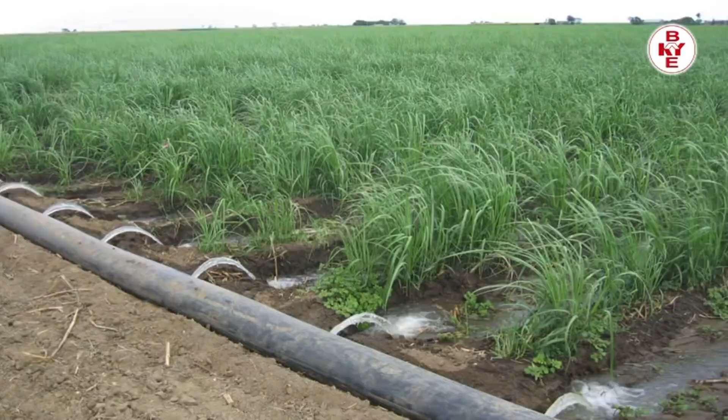Isgec Heavy Engineering Limited provides services to the customer for the development of sugarcane crop, including preparation of land, development of seed, cultivation of crop, application of biofertilizers and organic fertilizers, development of irrigation facilities, harvesting methods, and transportation system of the cane crop to the processing facility.

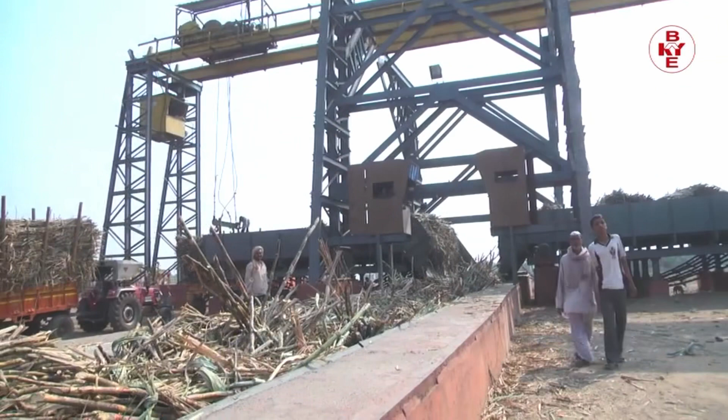Company also executes sugar manufacturing plants from cane sugar along with cogeneration, alcohol and ethanol on EPC basis including civil work. We provide training to the staff of customer and also operate the plant on their behalf as per requirement.

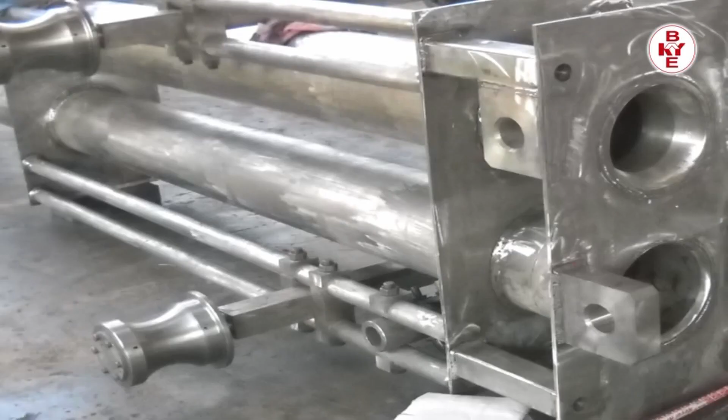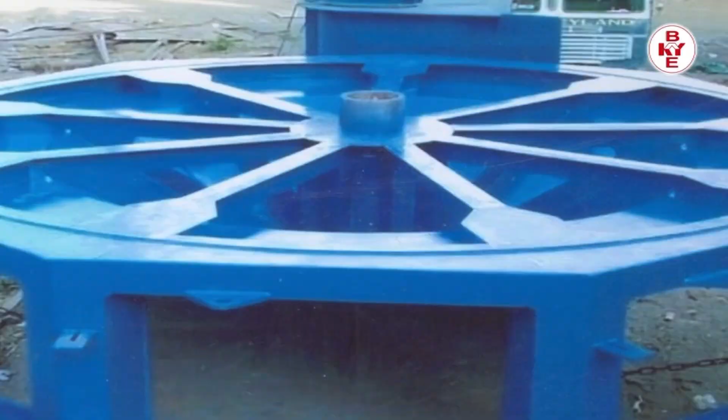Company also works for Department of Atomic Energy, Nuclear Power Corporation of India Limited, various defense laboratories and Indian Space Research Organisation. Company also works for oil and gas sector, supplies equipment to original equipment manufacturers of cement,

steel and paper industry. Isgec Heavy Engineering Limited, Unit 1 and 3 are located in Satara, Maharashtra, and Unit 2 is in Yamunanagar, Haryana. Our regional offices are in Pune, Chennai, Delhi and Yamunanagar.

Late Lala Kailash Chandra, a great visionary and philanthropist, is the founder of K Group of companies. Isgec Heavy Engineering Limited was incorporated on 4th October 1993.

The company is supported by a consortium of banks: Exim Bank of India, IDBI Bank, Bank of Maharashtra, Oriental Bank of Commerce and Dena Bank.

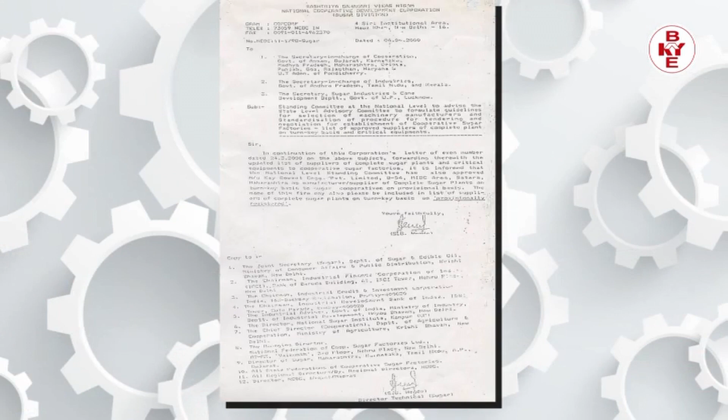Company is having registrations with National Cooperative Development Corporation for Turnkey Sugar Projects, Commissioner of Sugar Maharashtra for Alcohol and Ethanol Projects, Nuclear Power Corporation of India Limited, Department of Atomic Energy, Bharatiya Nabhikiya Vidyut Nigam Limited, Bhabha Atomic Research Center,

Defense Research and Development Organisation, Armament Research and Development Laboratory, Oil and Natural Gas Corporation, ISO 9001:2008 and AS 9100C for Quality Management, Directorate of Steam Boilers, R&U stamp by American Society of Mechanical Engineers, and the quality policy of the company.

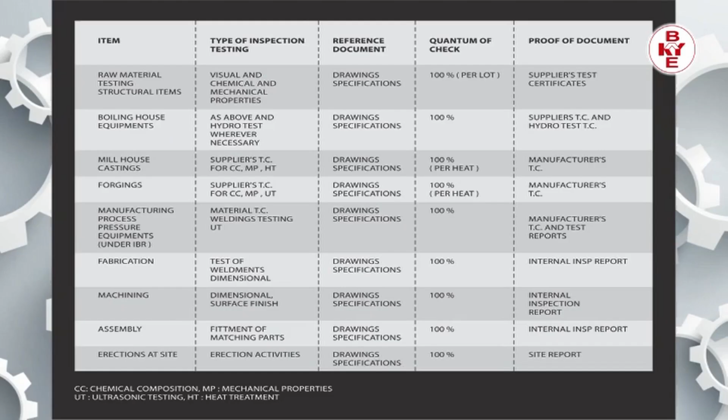Our quality assurance plans are in place. Isgec Heavy Engineering Limited is having following divisions: Sugar manufacturing plants, divided into following divisions: agriculture, sugar machinery, cogeneration, distillery, biocompost, operation, special products, and general heavy engineering.

Agricultural Division: In Agriculture Division, Isgec Heavy Engineering Limited gives support to farmers and industry for increasing the yield and recovery of the crop with advanced techniques, starting from seed generation to harvesting and transportation of cane to the processing facility. Generation of seed by tissue culture method.

In the tissue culture lab, we generate a variety of plantlets of any plant, absolutely disease-free, in a biohygienic and scientific way, especially for sugarcane. In any tissue culture lab, the apical meristem technique is used.

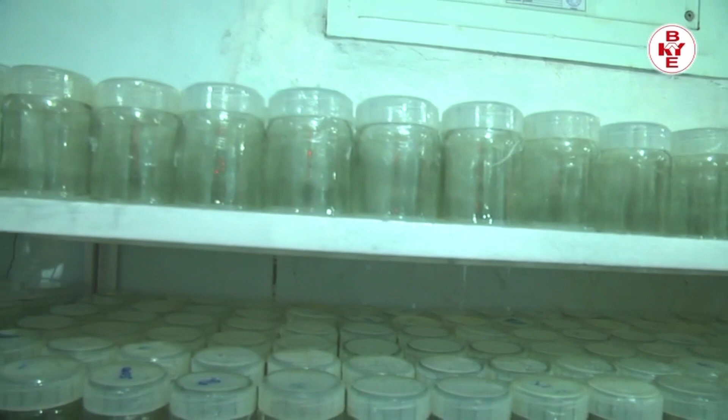We wash the glasswares with ordinary water and rinse with chemical. After sterilizing the glassware, different types of media are prepared as per variety of crop in the media preparation room at a constant temperature of 16 degrees Celsius.

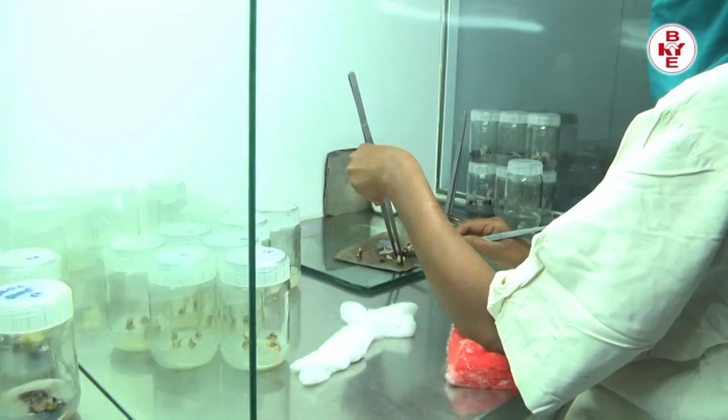After storing it for 2 days in 50 ml bottles, it is shifted to the inoculation room and kept for 20 to 25 days. When first generation takes place, these bottles are transferred to the incubation room having a temperature of 24 degrees Celsius. First generation of plantlets are multiplied in the incubation room in 4 stages over 150 days.

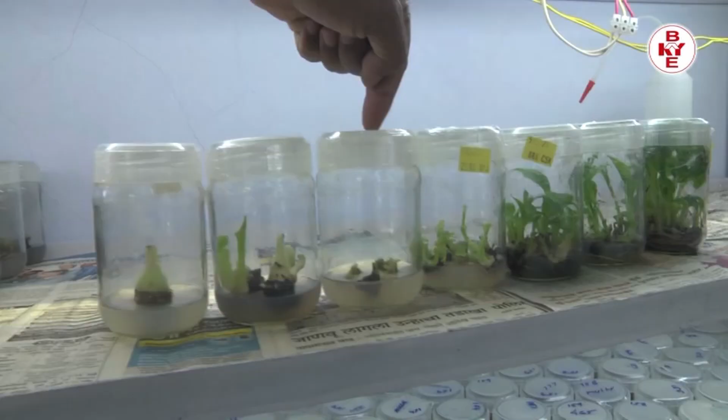These plantlets are converted into the shooting stage and finally the rooting stage. Rooting stage plantlets are transferred into the greenhouse in a tray and finally into polybags. Plantlets in polybags are planted in a scientific way, maintaining a gap of 1 foot between plant rows. The whole procedure of development takes about 7 to 8 months.

Preparation of land and cultivation of crop: we have to prepare the land for sowing disease-free plantlets produced in the tissue culture lab by maintaining the pH of the soil using lime powder, green manure and biocompost. Biocompost is generally made from filter cake, a byproduct of the sugar plant.

After plantation, bud germination takes place in 7 to 8 days to the extent of 98%. Organic manures in the form of biofertilizers are applied after bud germination, using biofertilizers with irrigation techniques. There are a number of biofertilizers named Acetobacter, Innophos, Innopotash, Innodecomposer and compost culture, which are applied for achieving maximum yield.

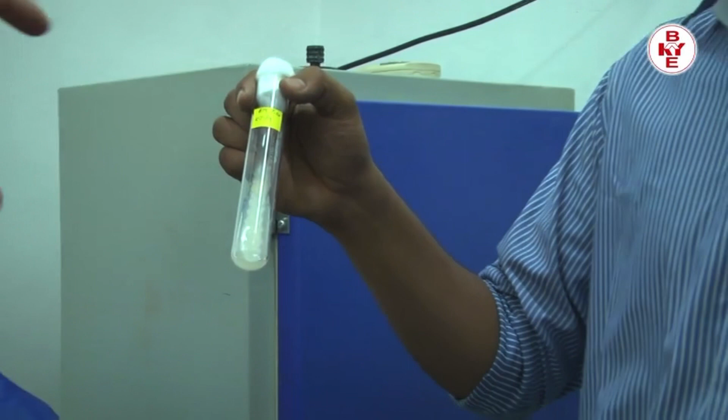Biofertilizers are made by solubilizing bacteria mixed with media. After inoculation, these are kept in shaking for 72 to 90 hours and finally diluted in a 1:5 ratio. The shelf life of these biofertilizers is 1 year and doses are about 10 kg per hectare. These are used once in 2 months and cannot be used after applying chemical fertilizers or insecticide.

While using biofertilizers, we should also concentrate on irrigation techniques. After 4 to 5 months of sowing, we have to manage pest, disease and weed control till 10 to 12 months, followed by harvesting, loading and transportation.

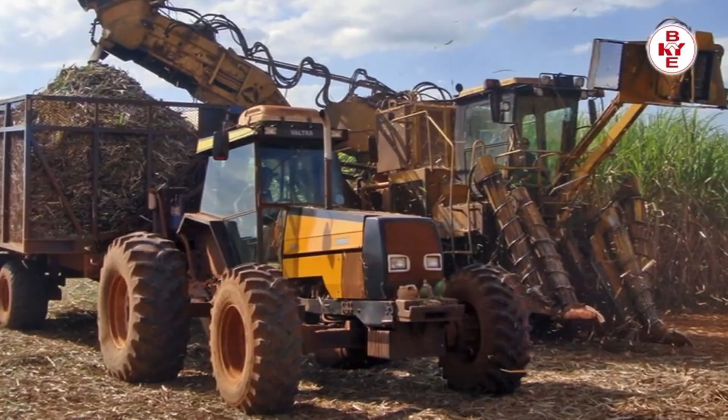At the age of 12 to 14 months, the crop is ready for harvesting and can be harvested manually or by mechanical means. During harvesting, trash should be taken out. Sugarcane stems should be loaded onto the vehicle manually or mechanically for transporting the crop to the processing facility. By using these scientific methods, we can achieve a yield of 80 to 100 metric tons of cane per hectare with 12 to 16 pol.

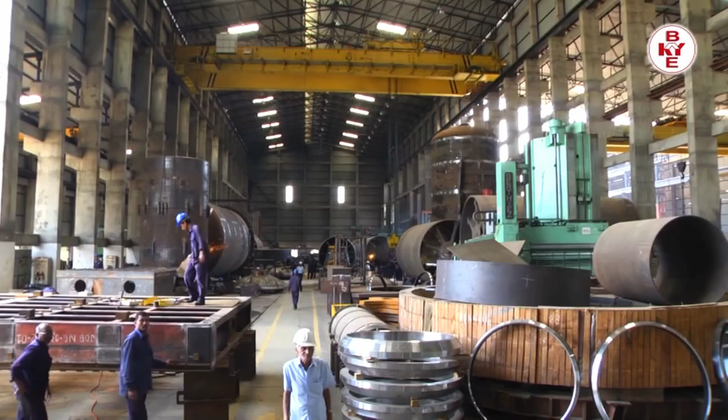Sugar Machinery Division: In this division, Isgec Heavy Engineering Limited undertakes designing, manufacturing, supply, construction and erection of complete sugar plants on an EPC basis. Here is a brief overview of our facilities.

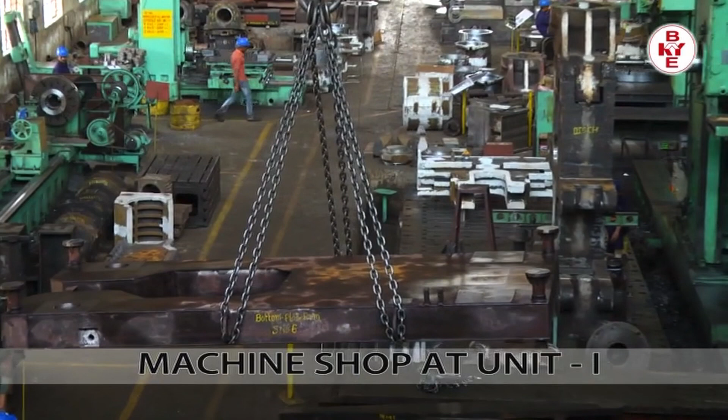Marketing and Engineering Office at Pune, Marketing and Engineering Office at Yamunanagar. View of Unit 1. Machine Shop at Unit 1. Stainless Steel Fabrication Bay at Unit 1. Machining facilities of Unit 1 at a glance.

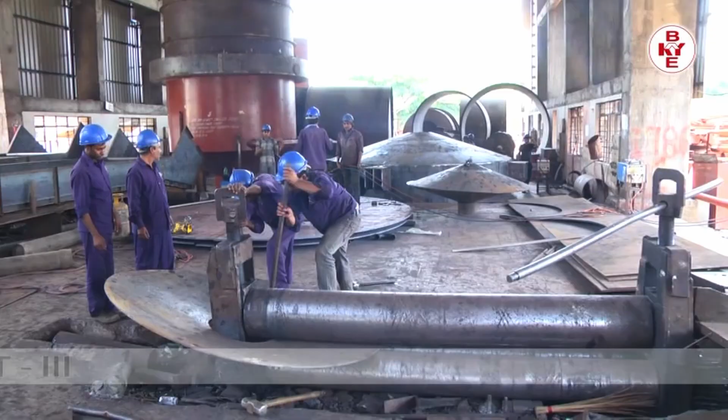View of Unit 3. Fabrication Bay at Unit 3. Machining facilities of Unit 3 at a glance.

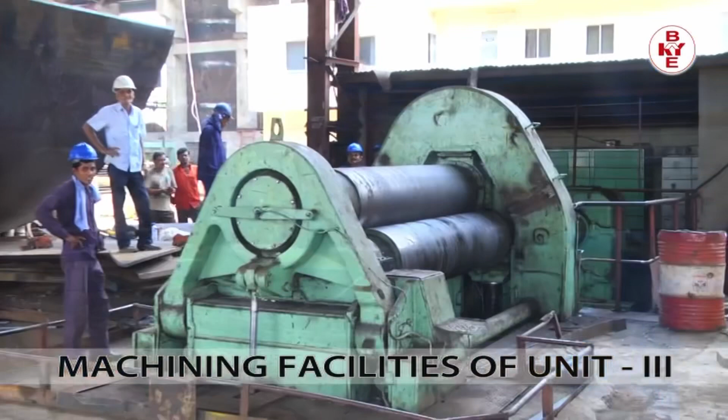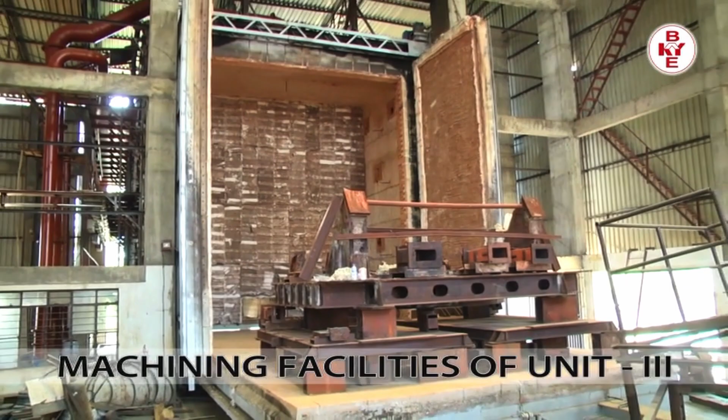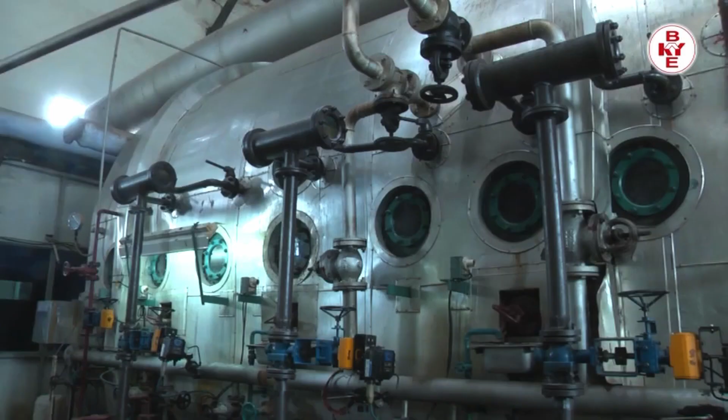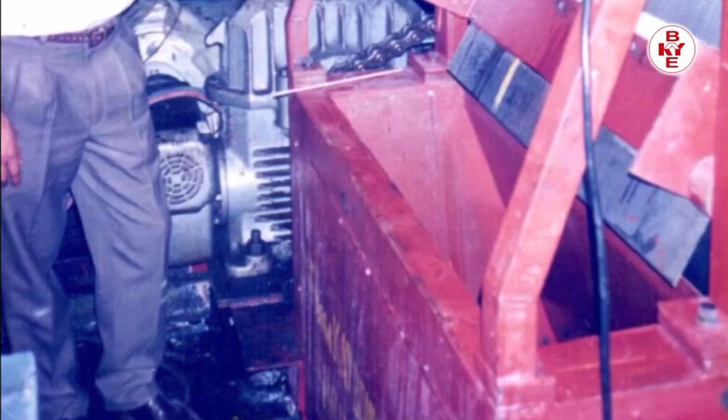View of Unit 2 at Yamunanagar. The company has innovated and successfully developed items for the sugar industry, including continuous pans for A, B and C massecuite, falling film evaporators, static type fluidized bed dryers for drying sugar, and massecuite filter typhoon for separating sugar particles from massecuite by vacuum.

Processing of sugar from sugarcane in one of the plants supplied by the company on an EPC basis. Milling section: after harvesting, the cane is brought to the processing facility and is weighed before unloading it with the help of cane unloaders or by truck tippler.

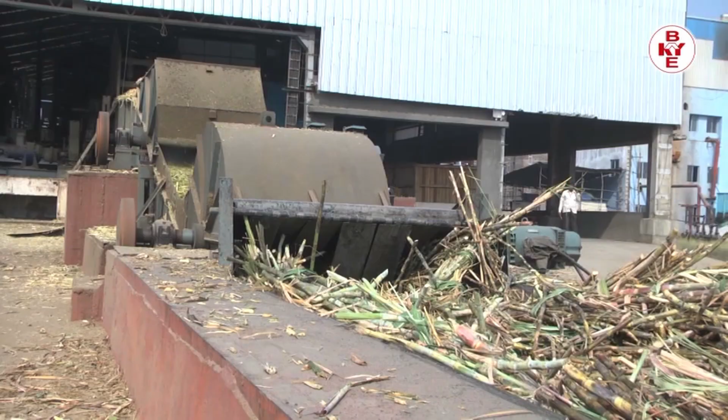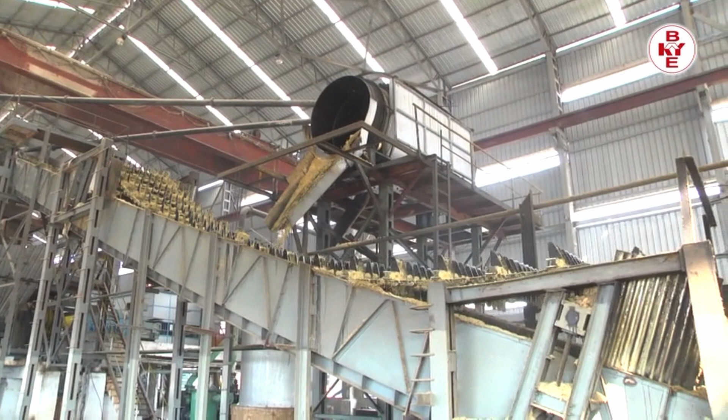Cane unloader places the cane on a feeder table to feed it onto the main carrier in a uniform and controlled manner. With the help of cane preparatory devices, namely cutter, leveler, fibrizer or shredder, the cane is cut into small pieces while being conveyed towards the mills; this is called prepared cane. The quality of prepared cane is measured in terms of preparatory index, which is usually maintained at 85+.

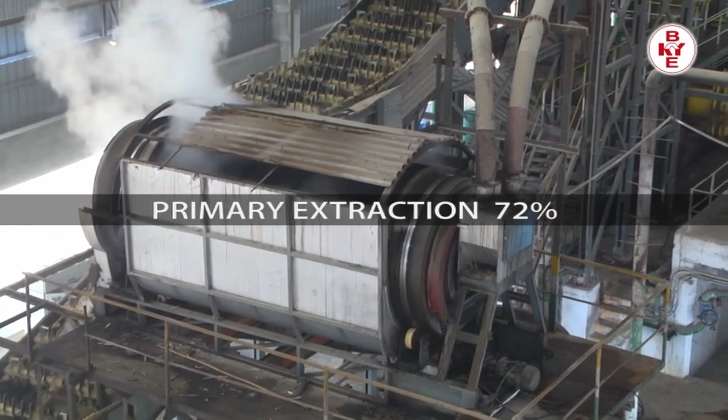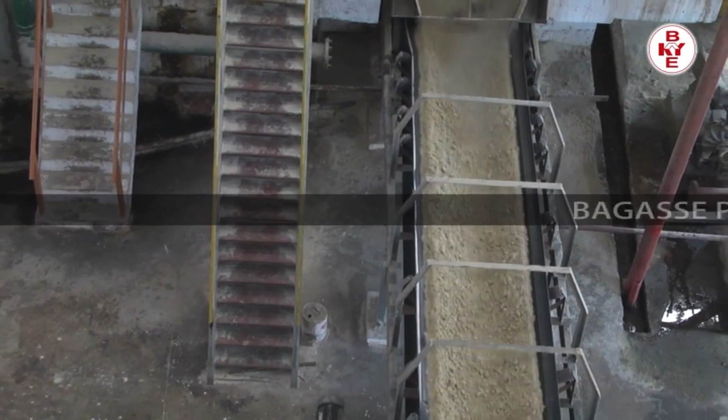This prepared cane is passed through a milling tandem to extract the juice. An efficient milling tandem should maintain performance parameters while crushing cane having 14% fiber.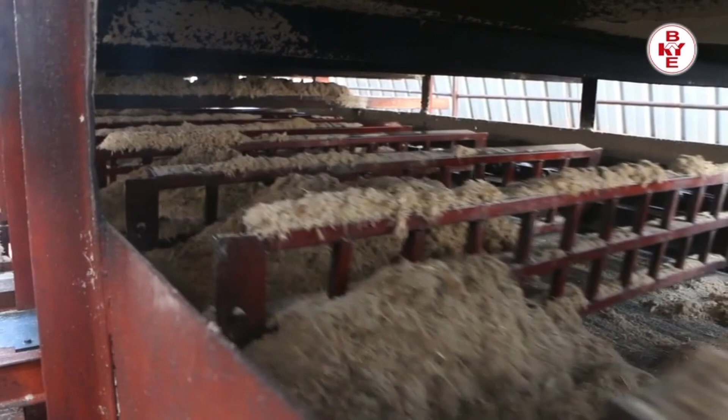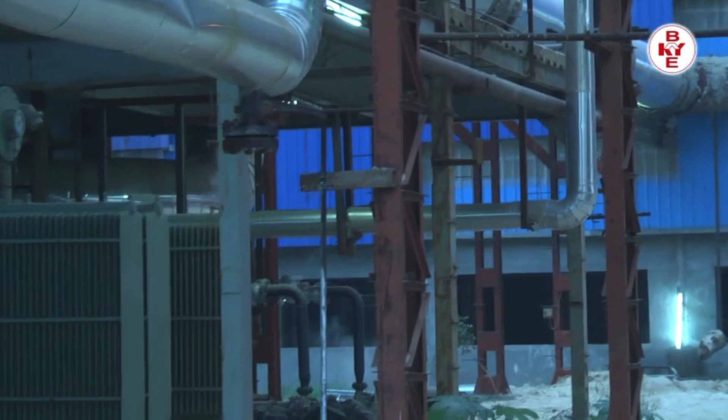Primary extraction 72%, reduced mill extraction 95 to 96%, bagasse pol 1.8 to 2%, bagasse moisture 48 to 49%. Boiler and powerhouse section: after the juice is extracted, the residual cane is called bagasse and is used as fuel in boilers to generate steam. Nowadays, high pressure boilers are used so that electricity can be generated by feeding this high pressure steam to the turbine. Whatever exhaust comes out from the turbine is used in the process house to produce sugar.

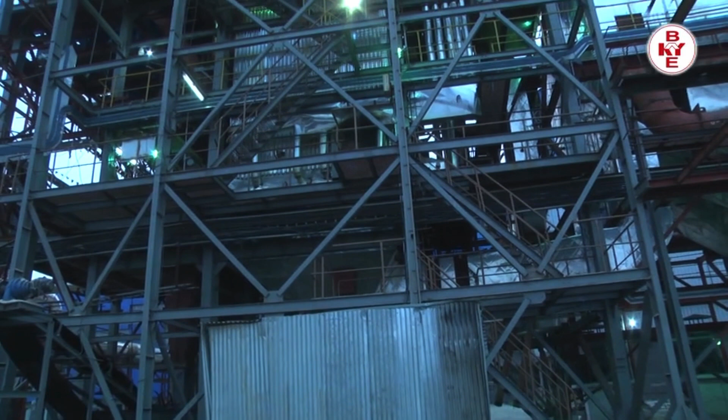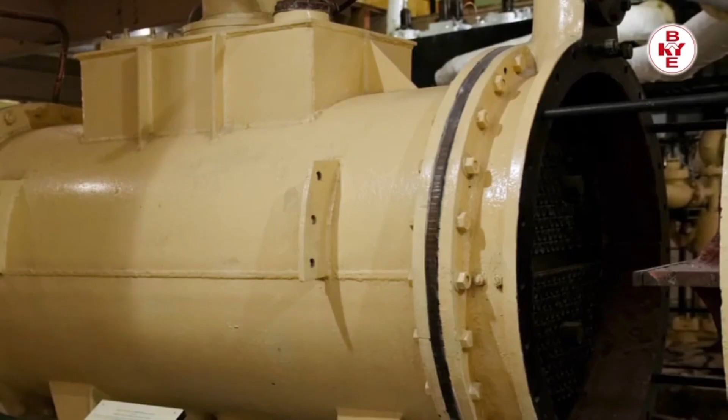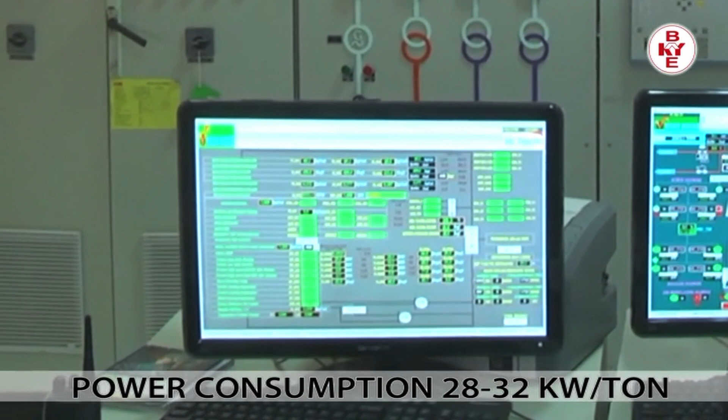Usually high pressure boilers having pressure up to 110 kg per centimeter square are used, and extraction-cum-condensing turbines are used to produce power. An ideal sugar factory should have a power consumption of 28 to 32 kilowatts per ton of cane. These types of plants are called cogeneration plants and are controlled by a DCS system.

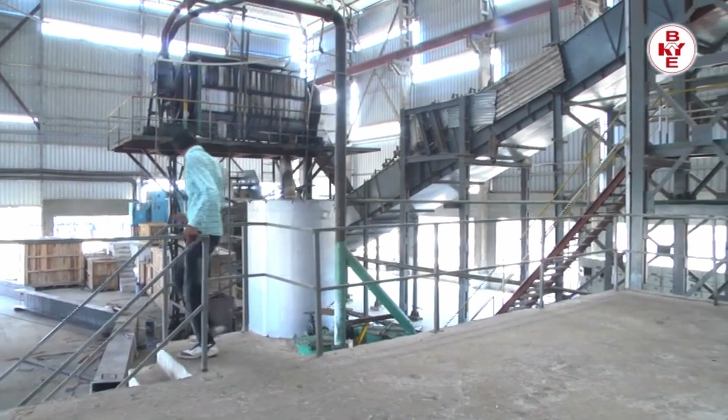Boiling house section: the juice extracted from the mill house is pumped through a flow meter to juice heaters for heating. This heated juice is sent to the juice sulfiter for purification with the use of milk of lime and sulfur dioxide. Sugar factories produce their own milk of lime using quick lime at the lime station, and sulfur dioxide by burning sulfur in the sulfur burner station.

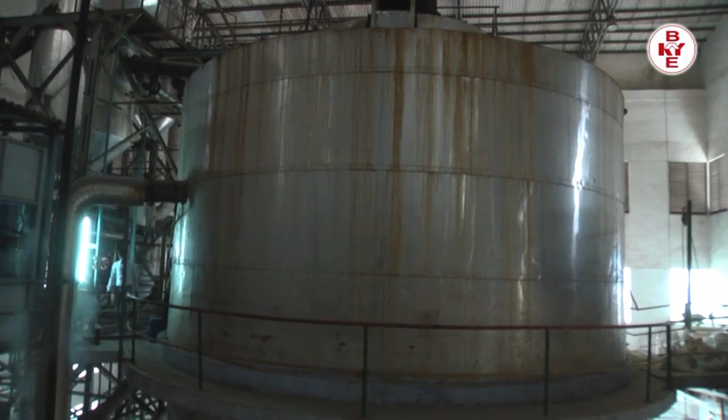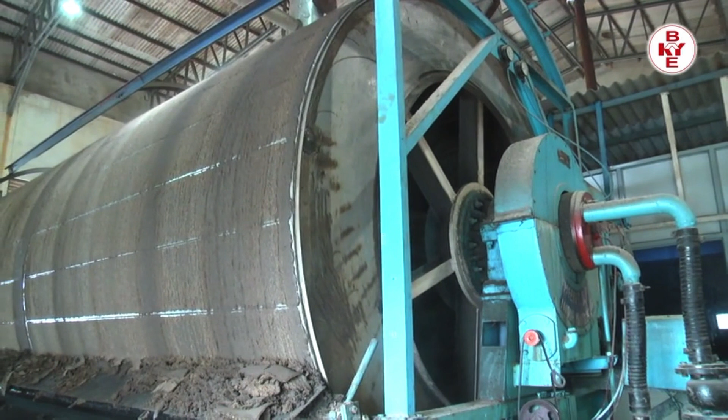After heating the juice in 2 to 3 stages, it is sent to the clarifier, where the mud is taken out from the juice. The clear juice is then sent to evaporators, whereas the mud with a certain quantity of juice is sent to the rotary vacuum filter for filtration.

In this process, whatever juice was left in the mud is taken out, and the residual called filter cake can be converted into biocompost organic manure by putting up a biocompost plant.

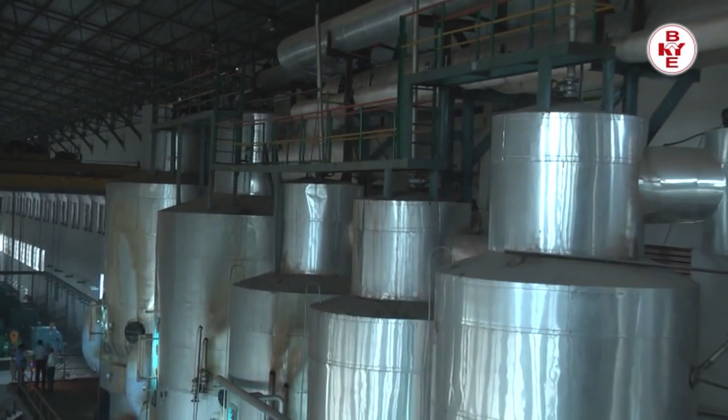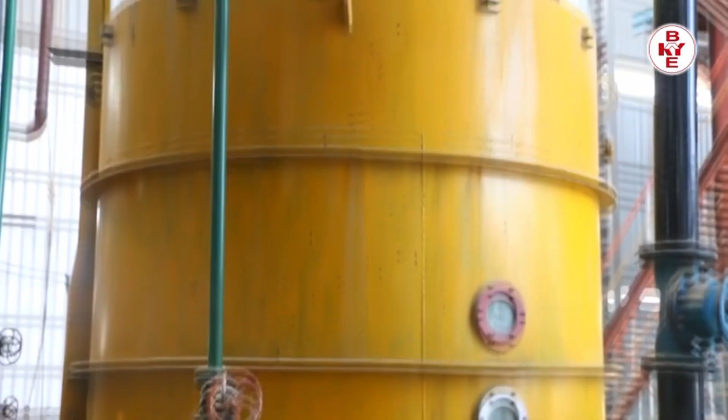The juice received from the clarifier is again heated in evaporators under vacuum and converted into syrup during the process. The syrup is processed again for removal of color in the syrup sulphitor. Syrup is then taken into pans for boiling, working under vacuum to create grains in the massecuite.

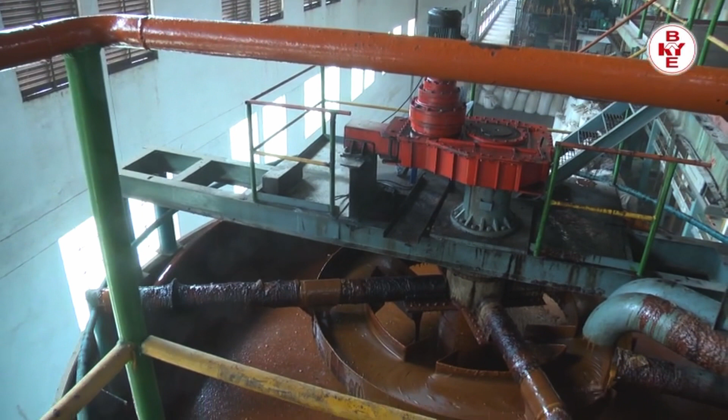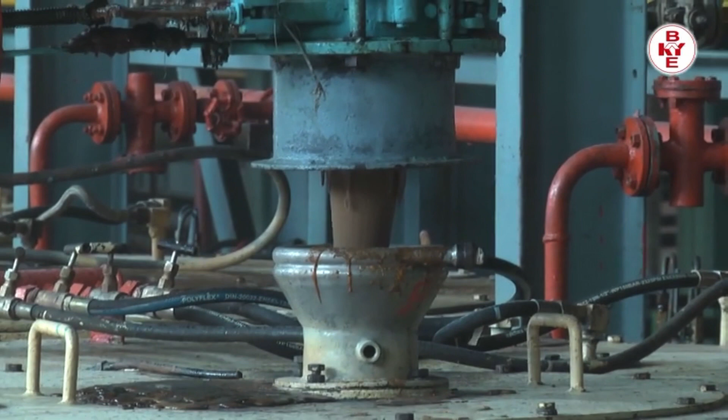This massecuite is dropped into crystallizers for cooling, and crystallization of sugar particles takes place. The material stored in the crystallizers is processed in the centrifugals to separate sugar crystals from massecuite. The residual material is called molasses, which is sent to the molasses tank.

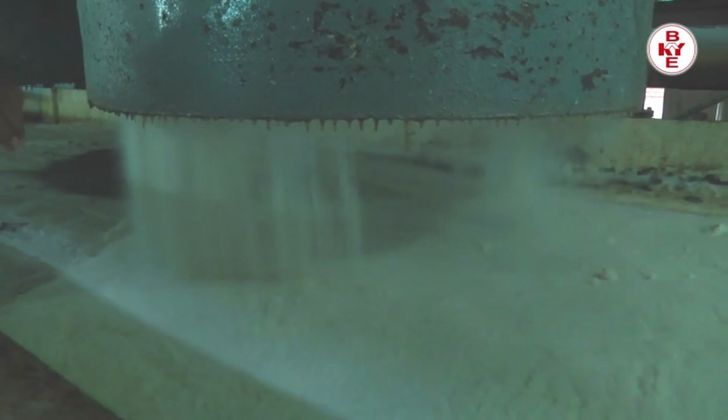Alcohol or ethanol can be produced with this molasses. The sugar obtained from the centrifugals is dried in a fluidized bed dryer with the help of hot and cold air.

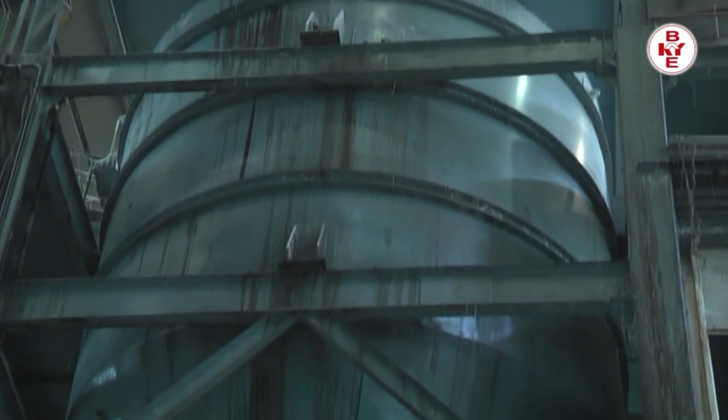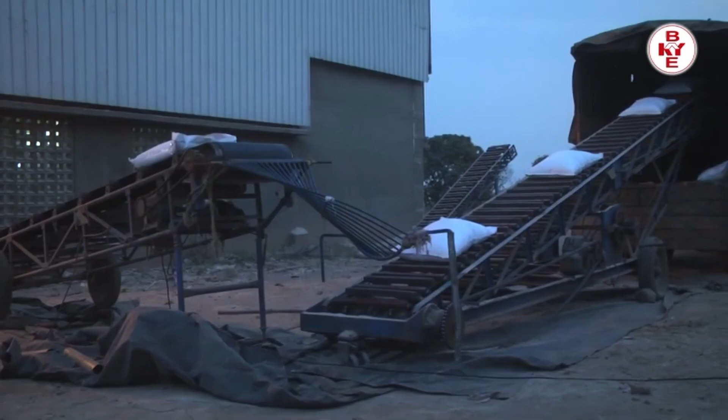Sugar is segregated into 3 categories called large, medium and small, depending on the size of crystals, using the grader, and is stored in bins. The sugar stored in bins is then weighed and packed in jute or HDPE bags. The sugar so produced is called white plantation sugar.

Some countries need refined sugar. For that, the raw sugar is reprocessed by the phosphatation process, and the color is removed using resin columns instead of sulfur dioxide. This sugar is called refined sugar.

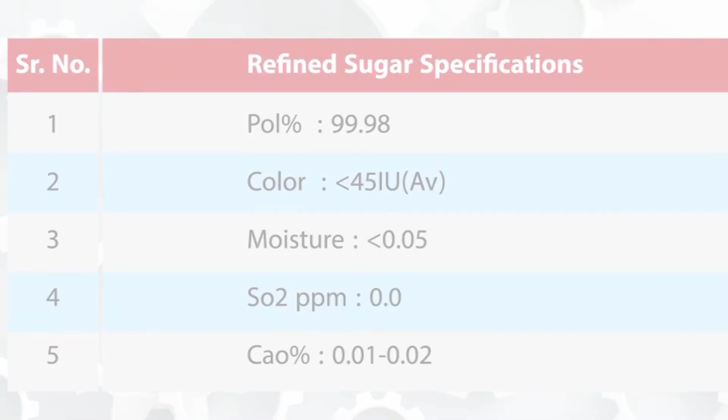Distillery Division. Our technical partners, Messrs. Reunion Engineering Limited of Brazil, designed, erected and commissioned the distillery of 600 KLPD.

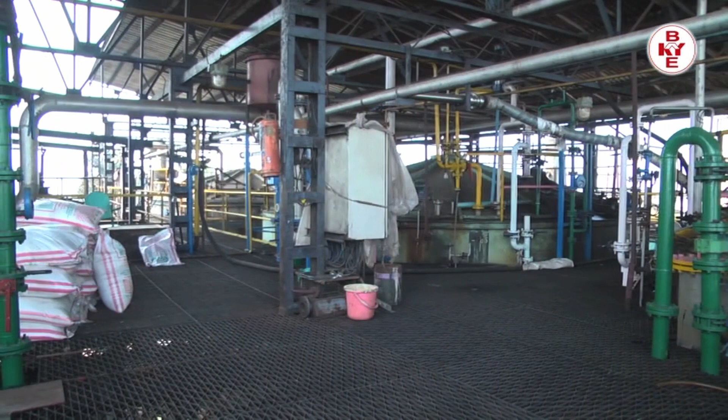Final molasses, a byproduct of the sugar plant, is used for making rectified spirit, alcohol, extra neutral alcohol and ethanol in the distillery. Final molasses, called mother liquor from the sugar plant, is fermented in fermenters with the help of yeast class fungi. During fermentation, the sucrose content present in mother liquor is converted into glucose and fructose.

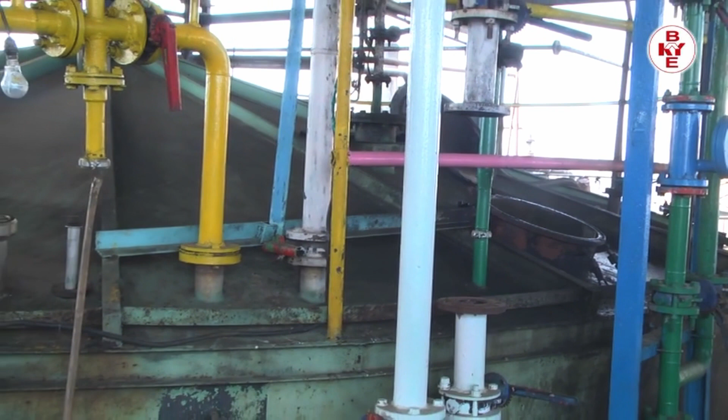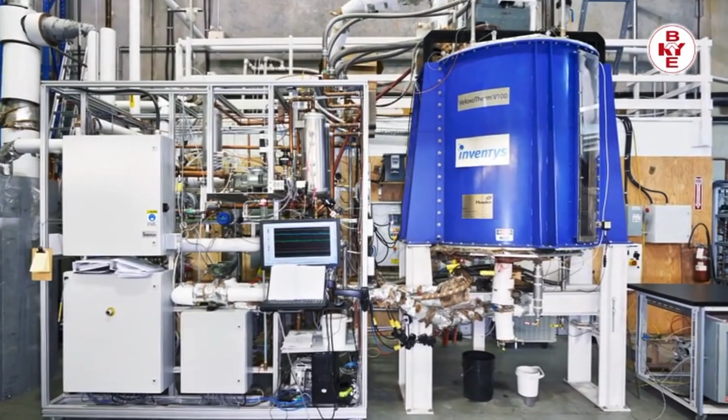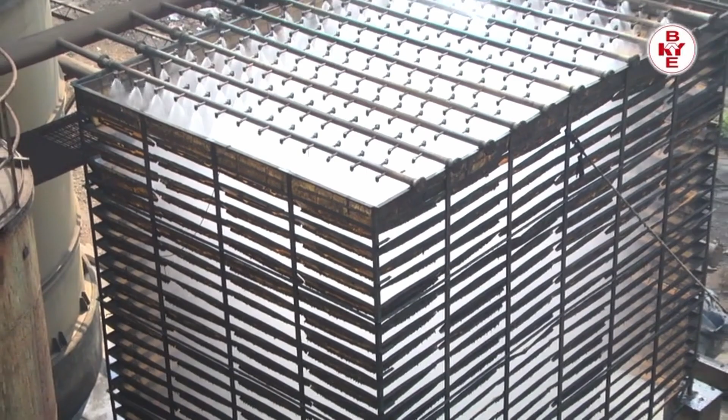The additionally generated CO2 is passed through CO2 scrubbers having water. CO2 gets absorbed in the water, and this water is used in fermenters for dilution. The liquid received from fermenters is taken to the distillation column for distillation, having 3 stages.

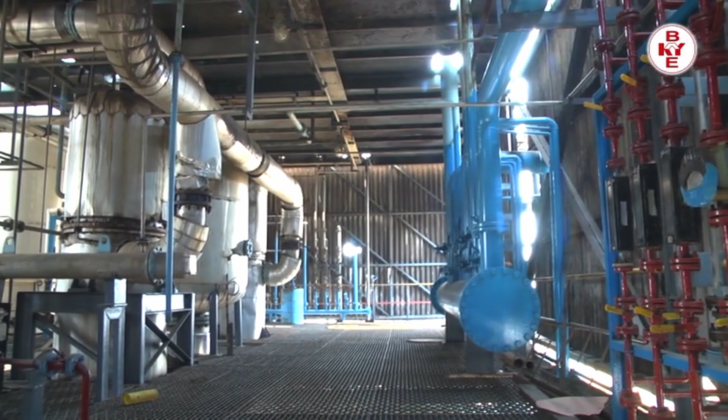Distillation in 2 stages takes place under pressure, and in the 3rd stage it is under vacuum. The vapor generated in these columns goes to the condenser for condensation and is purified in the hydrocolumn. The purified liquid so obtained is rectified spirit.

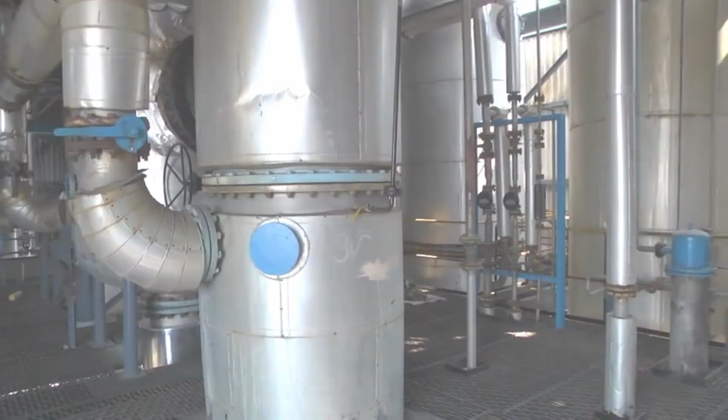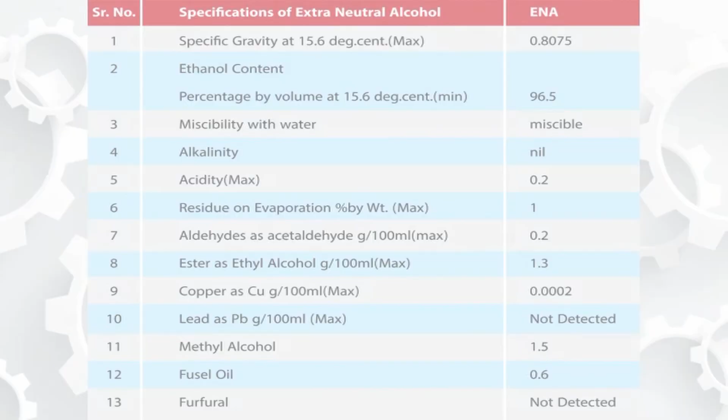By further processing of rectified spirit in rectified columns, extra neutral alcohol is obtained. ENA is cooled down to 30 degrees Celsius with the help of coolers for storing. By further processing of industrial alcohol, ethanol is produced.

Biocompost Division. The press mud or filter cake received from the filter station of the sugar plant is decomposed as biocompost and converted into manure. The filter cake is spread on the ground to reduce its moisture from 75% to 40% through sunlight. Spent wash coming from the distillery is sprayed on the filter cake for generating bacteria.

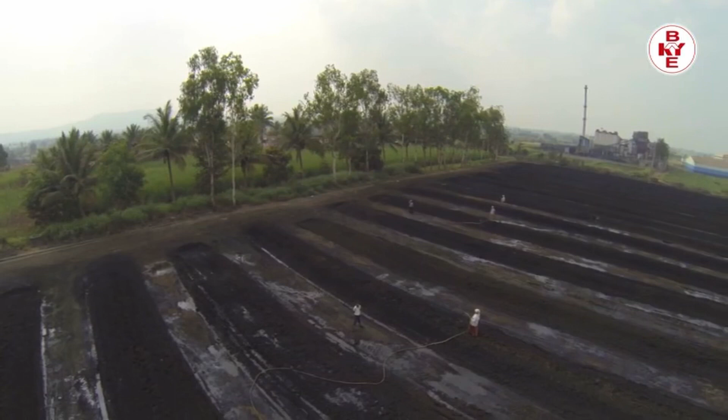This process takes 2 to 3 months. Once the bacteria is generated, it is again stirred with the help of a mechanical system and sprayed for drying. The product that comes out after drying is known as biocompost manure.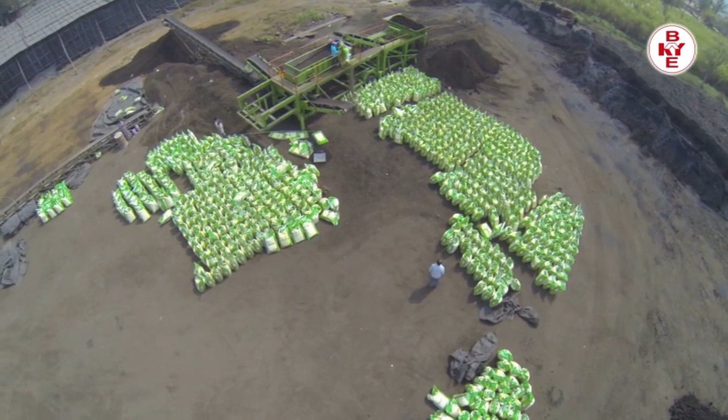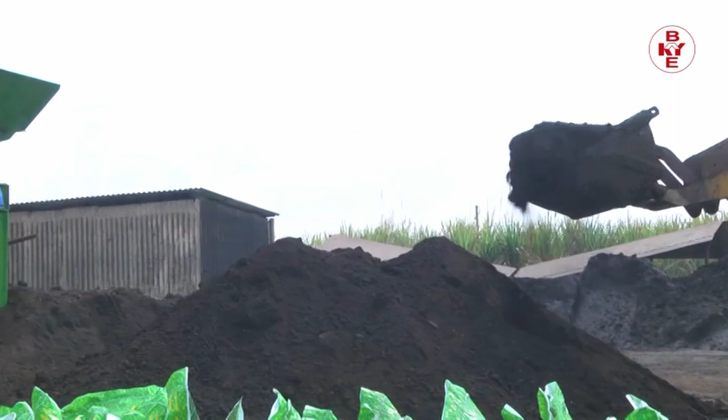Once biocompost manure is dried, it is fed to the screening machine, where it is screened and the good quality manure is bagged, while waste manure is recycled with press mud. This manure is very good for the sugarcane crop, especially at the time of preparation of land.

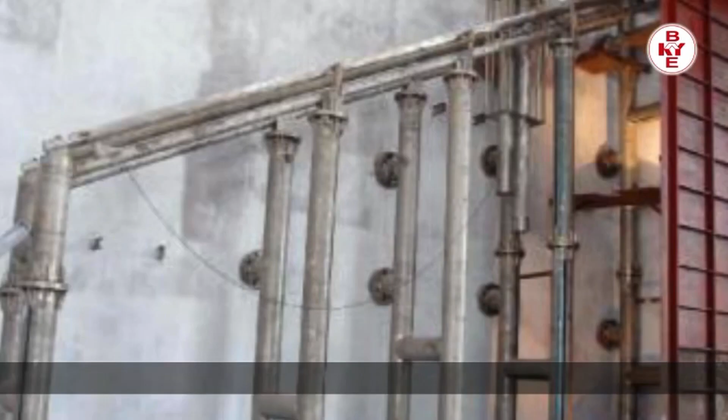Special Product Division. This division was started in 1999 to serve the nation by manufacturing and supplying special purpose equipment and machinery required by defense laboratories, the Department of Atomic Energy, and the Indian Space Research Organization.

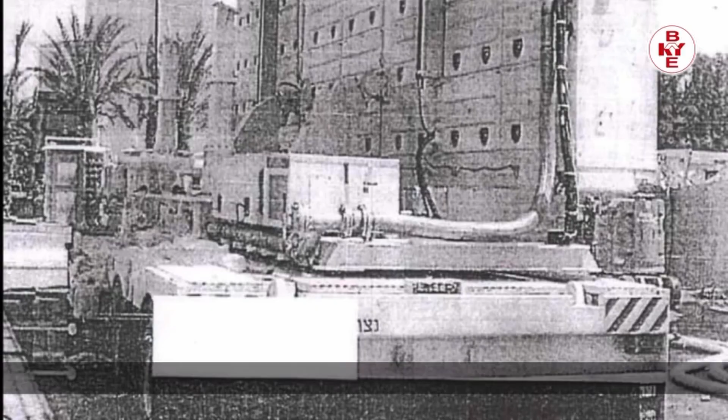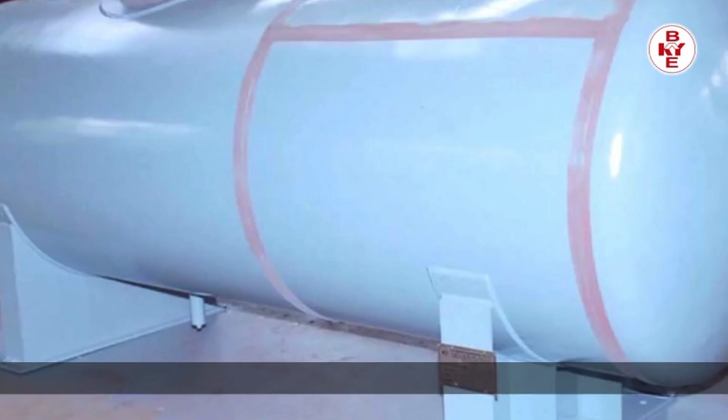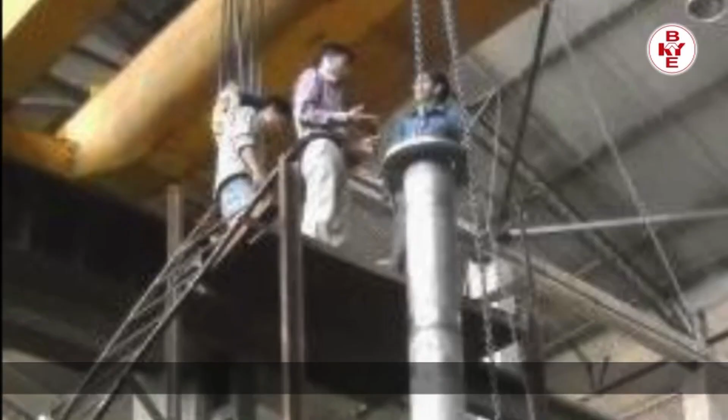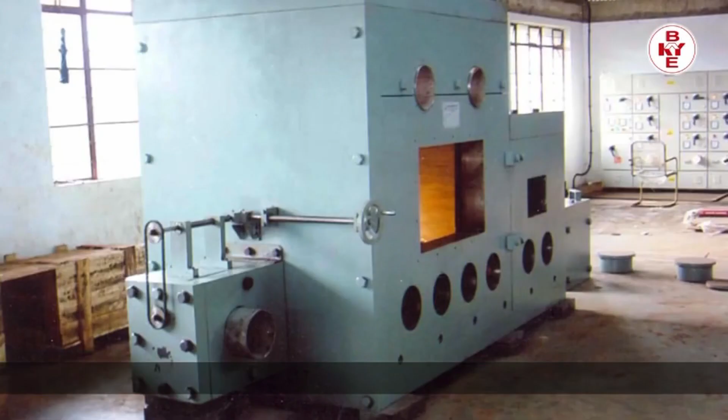Some of our main products are for the Department of Atomic Energy and for defense laboratories.

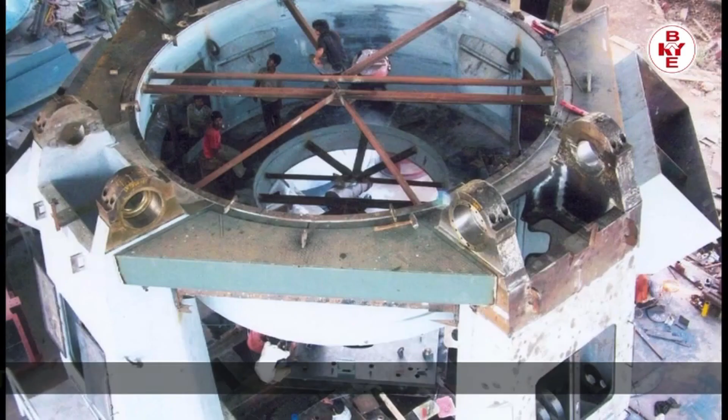General Heavy Engineering Division. We are providing our services to many OEMs and end users in cement, steel, material handling, paper, and general heavy engineering companies. We are also manufacturing jobs and equipment as per customers' design and quality norms.

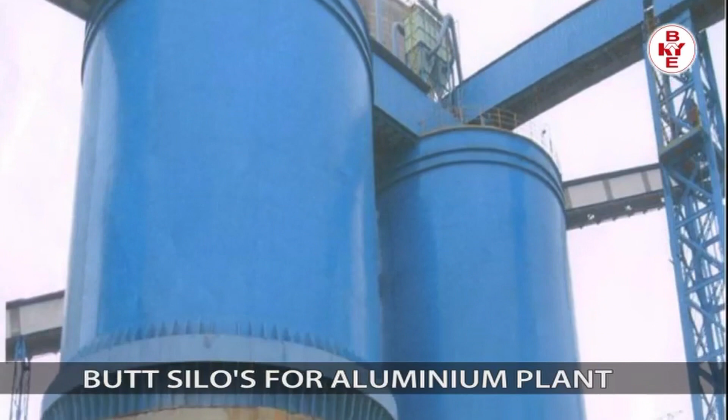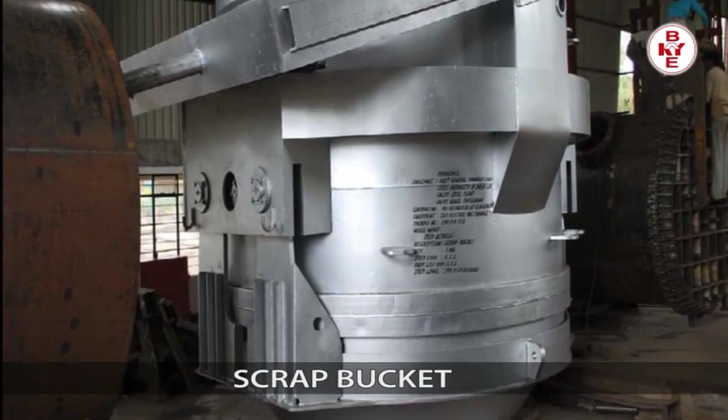The equipment is manufactured as per ASME standards for material selection, material testing, welding, fabrication, heat treatment, machining and testing. We are equipped with all kinds of NDT testing, hydro testing and pressure testing facilities.